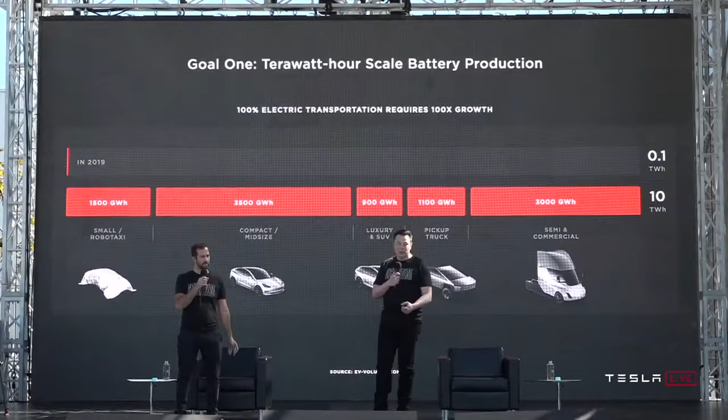Yeah, and you can see we're talking about 100x growth in batteries for electric vehicles to achieve this mission. And we are going to get there. It's just a matter of how fast, and our intention is to accelerate it. Yeah. You basically need on the order of roughly 10 terawatt hours a year of battery production to transition the global fleet of vehicles to electric. And the average vehicle lasts 15 years, so we're talking about 150 terawatt hours, give or take, to transition all vehicles of all types to electric. Yeah, so it's a lot of batteries, basically.

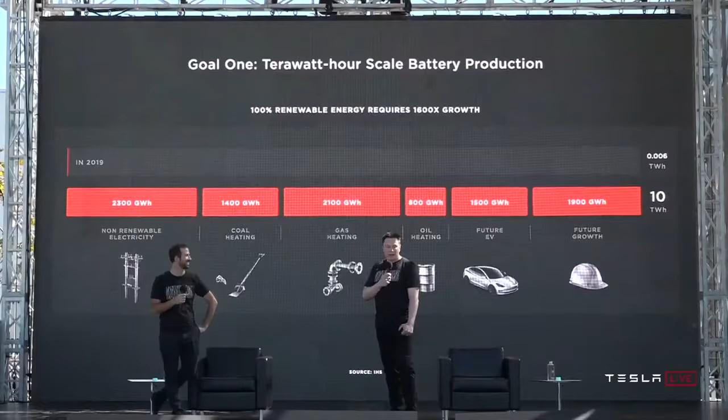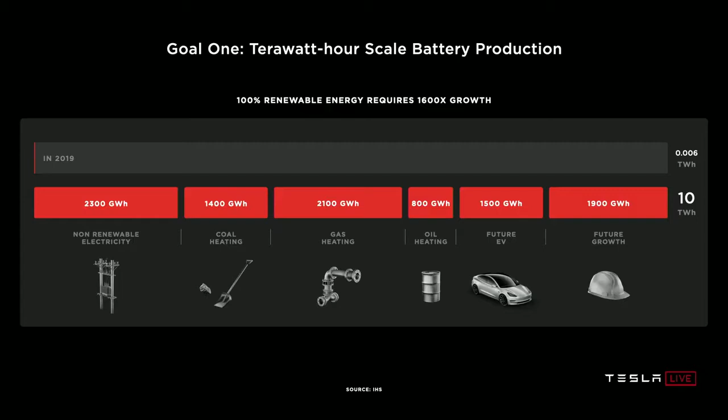And then on the grid side, we have a similar mountain to climb, 1,600 times growth from today's grid batteries to go 100% renewable on the grid and to take all of the existing heating fossil fuel uses in homes and businesses 100% electric. Yeah, and this number might grow even more as the world economy matures and as countries with high populations industrialize. But let's say it's roughly 20 to 25 terawatt hours per year, sustained for 15 to 25 years, to transition the world to renewable. This is a lot.

So today's batteries cannot scale fast enough. They're just too small. For Giga Nevada, 150 gigawatt hours per year is what we probably expect to make out of there. But this is really pretty small in the grand scheme of things. That's only 0.15 terawatt hours.

And it costs too much. So we would need 135 fully built out Nevada gigafactories to achieve 20 terawatt hours a year. It's not scalable enough of a solution. We need a dramatic rethink of the cell manufacturing system to scale as fast as we can and should.

Yeah, and I think we should view this as more than just a question of money. Money is sort of like an ethereal thing, but it's really the amount of effort. You have a certain amount of effort, in terms of people and machines, and depending on how efficient that effort is, for a given amount of effort, you want the most amount of batteries.

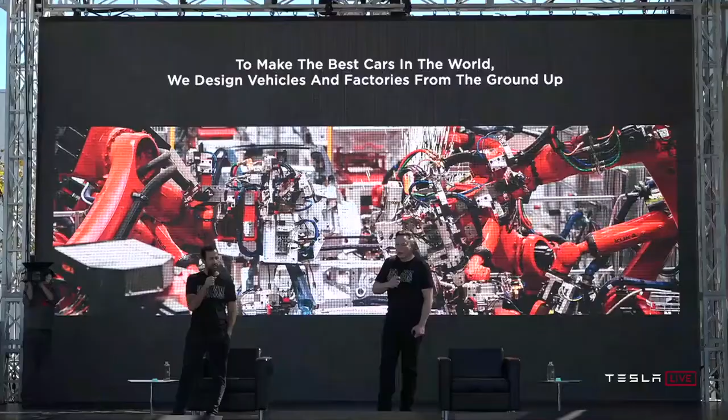And EV market share is growing, but EVs still aren't accessible to all. And you can see, as Drew was saying, it's starting to flatten out a little bit because the rate of improvement of the affordability of cars is just not fast enough. So that's why we got Battery Day. Yeah. To make the best cars in the world, we design vehicles and factories from the ground up. Next. And now we do this for batteries as well.

It's weird, the slides don't show up quite right. Anyway, what shows up on the screen is not quite what shows up there. Oh, okay. It's different. Yeah, I think it's because that's, yeah. No, that one's supposed to be current.

Anyway. So let's get started. We have a plan to halve the cost per kilowatt hour. And it's not a plan that rests on a single innovation, some research project that'll never see the light of day. It's a plan that has taken creative engineering and industrialization across every facet of what makes a cell into a battery pack, from raw material to the finished thing.

And we're going to go through that plan with you today, step by step, and build up how we get to these goals and how we accelerate this transition and make our vehicles and our grid batteries more affordable. Yeah. I mean, we basically thought through every element of the battery, well, almost every element. There are a few more elements that we won't get to today, but we will get to in the future.

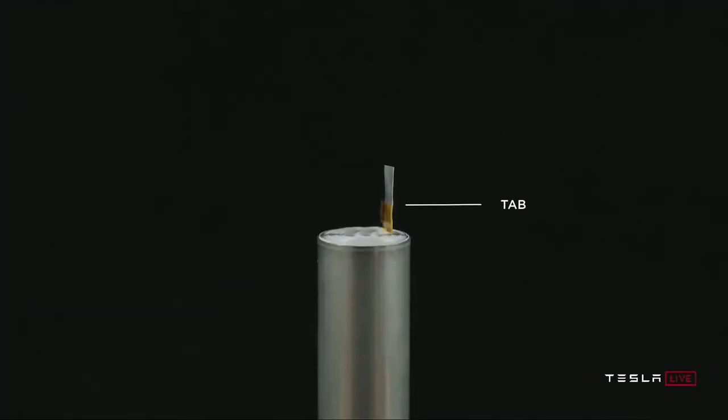So first, before we get too far into it, let's talk about what is in a battery cell. We've got the cap and the can, negative and positive terminals of the cell. When you open that cell, you've got a tab connected to those terminals, what we call the jelly roll, which is the wound electrodes on the inside. You can actually see what this looks like as you unwind it. This is over a meter long in a typical 2170 cell. So it's quite a long winding process. And you can see the tab still there.

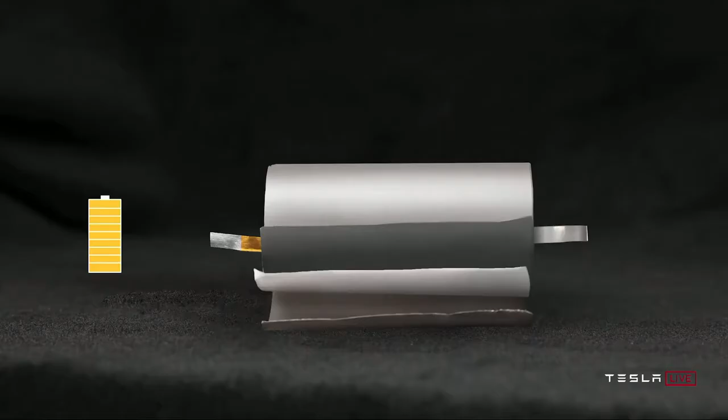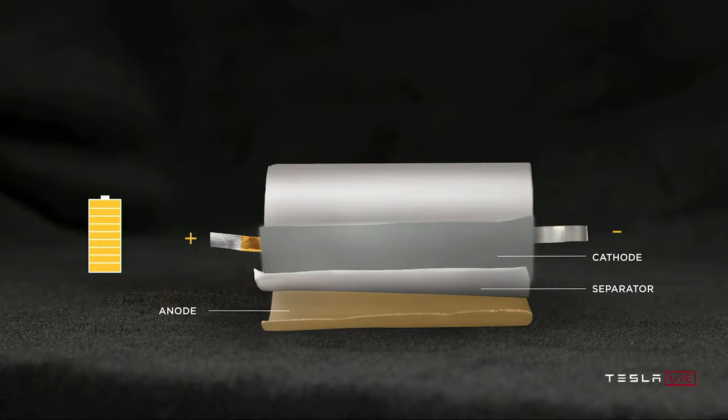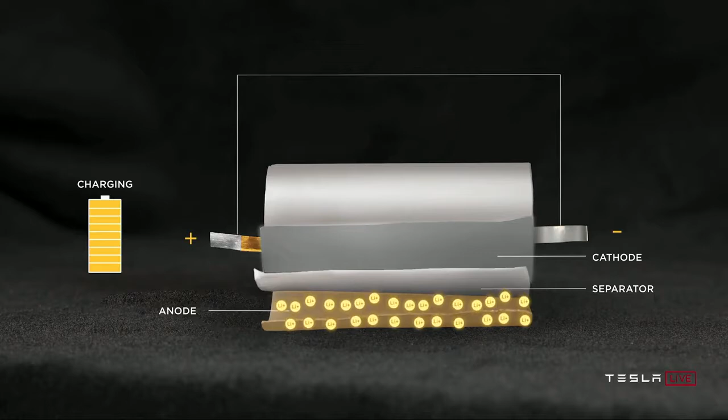To explain what's actually going on here, we've identified anode, cathode, separator, positive and negative terminal. Watch what happens as we discharge the cell. Got lithium moving from anode to cathode, and then the reverse when we charge the cell, lithium moving from cathode to anode across the separator. This is the basis of all lithium-ion batteries, no matter what the form factor is.

And when we look at what's happened to date, at least in our products, we've moved from the 18650 form factor to the 2170 form factor through great collaboration with our partners, Panasonic, new partners like LG and CATL, and probably others in the future.

Yeah. Actually, a slight note on why one is called the 18650 versus the 2170: the first two digits refer to the diameter, and the second two digits refer to the length. So that helps explain what's up with these weird numbers. But nobody could explain to me why there was an extra zero.

So like, okay, well, we're deleting the zero that nobody can explain in future form factors. So that's why technically it's the 18650, bizarrely, but going forward it's the 2170, because we just got rid of the extra zero because it's pointless. And this was an evolutionary step, going from 1865 to 2170, bringing 50% more energy into the cell.

But when we look to the ideal cell design, if we were to do it ourselves, we need to go beyond just what we're looking at in front of us, and study the full spectrum of options. So as you can see, we swept the key figures of merit, how much we can reduce the cost, and how much vehicle range increases as we change the outer diameter of the cell. We found a sweet spot somewhere around 46 millimeters.

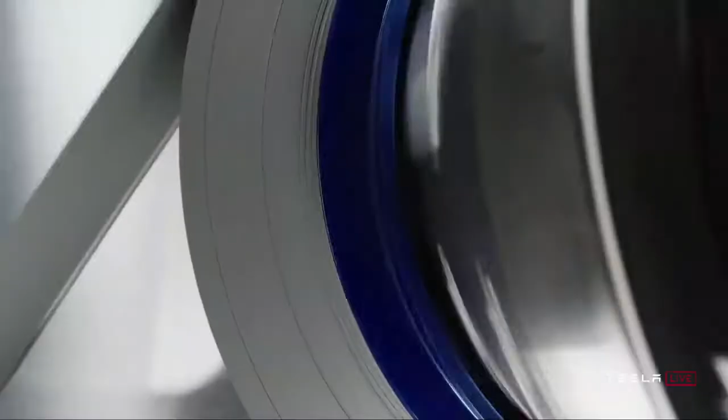Yeah, and I want to stress, this is not just a concept or a rendering. We are starting to ramp up manufacturing of these cells at our pilot 10 gigawatt hour production facility just around the corner. Yeah. So, yeah. It's a video of some of what's going on in the plant.

Now, to be clear, it will take about a year to reach the 10 gigawatt hour capacity. So this is important to appreciate. When you build a factory, there's a certain capacity that you design to, and then it takes some period of time to actually achieve that capacity. So I would say it's probably about a year before we get to the 10 gigawatt hour annualized rate with the pilot plant. And this is just a pilot plant.

The actual production plants will be more on the order of maybe 200 gigawatt hours, maybe more over time. And thank you.

But let's stack up everything we just saw at the cell level. So just the cell form factor change enables a 14% dollar per kilowatt hour reduction, just that cell form factor change. And now that you've been teased on this factory, we're going to go on and walk step by step through that factory and discuss a series of innovations there.

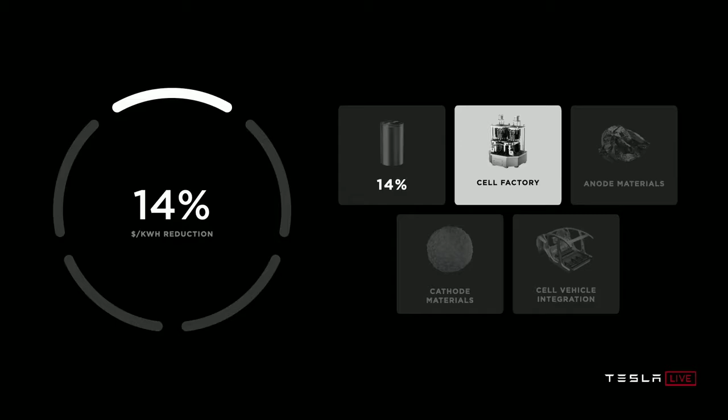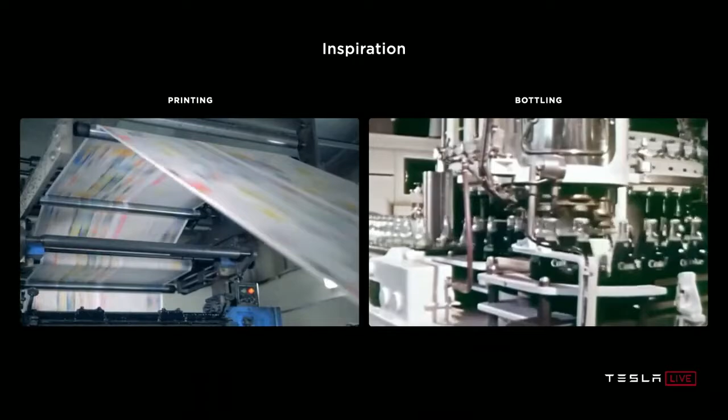When thinking about the ideal cell factory, we have inspirations behind us in the paper and bottling industry, where from humble beginnings, over a century of innovation has enabled mass scale, continuous motion, unbelievably low manufacturing cost. And when we think about the lithium-ion industry, which is really only in its third decade of high-volume production, it has so far to go to achieve similar scale and simplicity. And that was the inspiration that we set out to the team as we thought about how to marry cell design and manufacturing in the best possible factory.

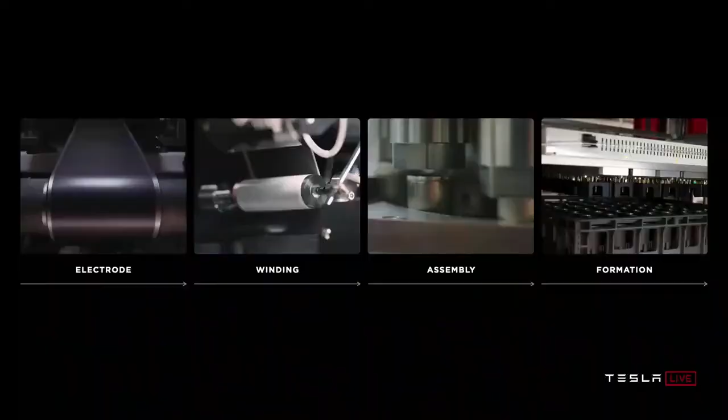And let's talk a little bit about what's in a cell factory. First, there's an electrode process where the active materials are coated into films onto foils. Then those coated foils are wound in the winding process we just talked about, where if you do have tabs, you have to start and stop a lot.

Then the jelly roll is assembled into the can, sealed, filled with electrolyte, and then sent to formation, where the cell is charged for the first time, and where the electrochemistry is set and the quality of the cell is verified. And we set out at every step of this process to try to take that inspiration we just showed and think about how we make those processes fundamentally better and more scalable.

And one of the most important processes is where it all begins, the wet process of the electrode coating. And just to give you all a sense of scale, I'm going to walk through what's in that wet process. You've got mixing where the powders are mixed with either a water or a solvent for the cathode. That mix then goes into a large coat and dry oven where the slurry is coated onto the foil, huge ovens, tens of meters long, dried, and that solvent then has to be recovered. You can see the solvent recovery system.

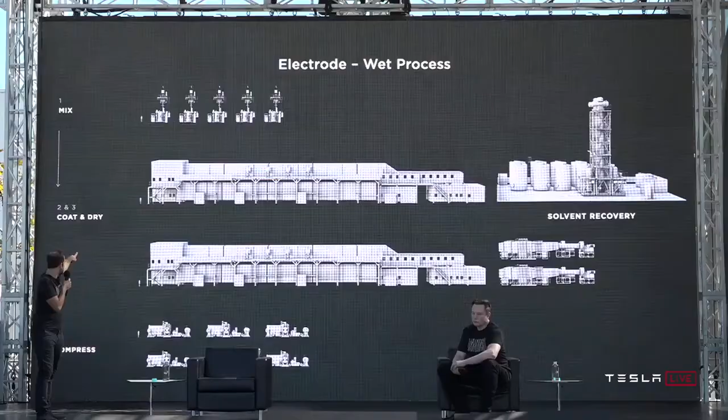And then finally, the coated foil is compressed to the final density. And when you're looking at this, you're like, wow, that's a lot of equipment for one step, especially when you consider that little speck next to the coating oven is a person. This is serious iron involved in making batteries.

Wouldn't it be great if we could skip that solvent step, which is one of those dig a ditch and then fill it kind of things where you put the solvent in and then take it out and recycle it, and just go straight to dry mix to coat? And that's what the dry process really is about. And in the most basic form, you can see it here on a benchtop. Literally, powder into film. As simple as that.

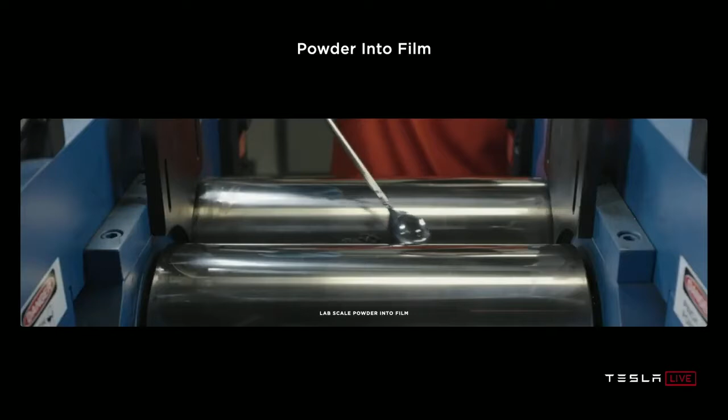I mean, it's hard, actually, just to be clear. If this was easy, everyone would do it. So it's not like dry coating electrode is actually easy. It's actually very hard to do what appears to be a simple thing.

And it's worth noting, we did acquire Maxwell a little over a year ago, I guess. It's certainly a good company, but the dry coating they had was, I would call, proof of concept. Since the acquisition, we've actually revved the machine that does dry coating 4 times. So we're in revision 4 post acquisition of the machine, and there's still a lot of work to do.

So I would not say this is like completely in the bag. It's still a lot of work to do, and as you go from benchtop to lab to pilot to volume production, there are actually major issues that you encounter at every level. It's not like you make something work on your bench and bingo, now you can make a bazillion of it. Absolutely. It's insanely difficult to scale up.

Yeah, to be clear, I would like to not say that right now it's just totally working. Even now, at the pilot plant level, it is close to working. Well, it's fair to say it does work, but with not a high yield. Yeah. So we're still ironing out the kinks, but we've made tens of thousands of cells, thousands of kilometers of electrode. We are on the 4th generation of the equipment, so we've learned a lot along the way.

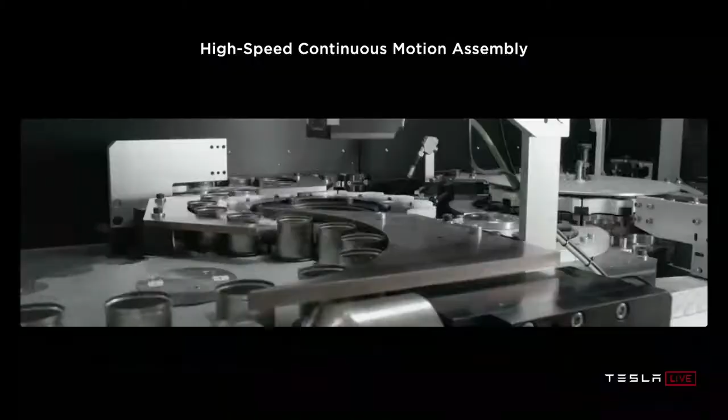The key to a high-performing assembly line is accomplishing processes while in motion, continuous motion, and thinking of the line as a highway, max velocity down the highway, no start and stop, no city driving. Exactly, no stoplights and traffic lights or anything. You want the highway. I want the highway.

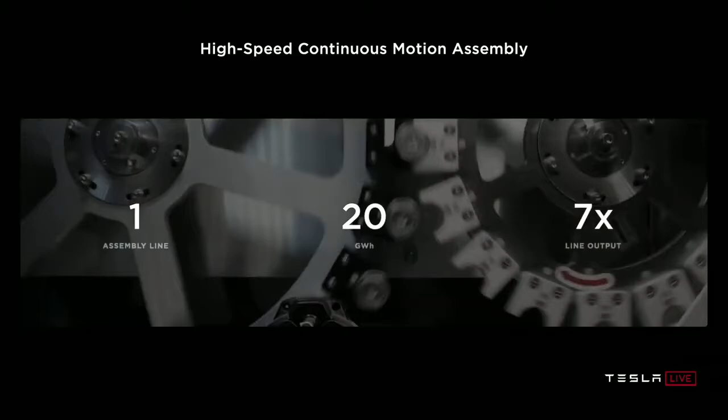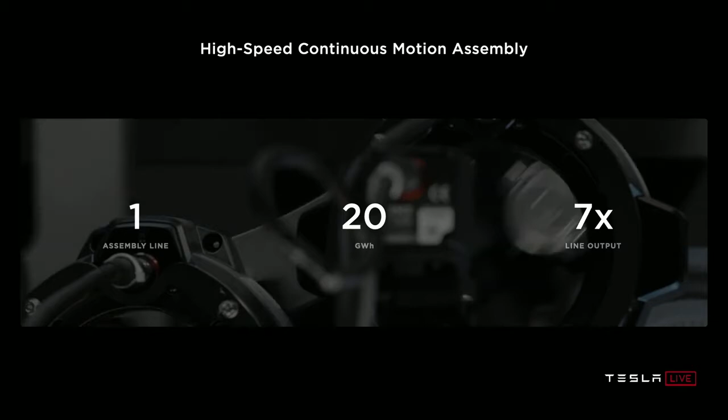Yeah. And together with our internal design team that makes and designs this equipment, we coupled thinking about how to make the best cell with thinking about how to make the best equipment so that we could accomplish the fastest parts per minute rates on all of these tools. And through all of that development, we were able to get to the point where we can implement assembly lines: one line, 20 gigawatt hours, 7 times increase in output per line. And when you're thinking about scalability and pure effort, having one line be 7x the capability is just effort multiplying. Yeah.

You can sort of think about the fundamental physics of a factory. I think it's actually quite a lot like the rocket equation, where you've got your exhaust velocity and then the log of the start to end masses. So it's basically saying, how fast are things going and what percentage of the factory volume is doing useful work. And conveyance does not count as useful work. So only the value-added steps.

If you break the factory down into cubic meter sections, or smaller, it could be like 1 liter sections, and say, is a majority of this volume doing useful work? You would be astounded at how bad most factories are. They're like maybe 2 or 3%, including our factory in Fremont. So I think it is possible to get to at least 10 times that volumetric efficiency. So more like 30% ish, maybe more, and be 10x better, which means the factory can be 10 times smaller.

And then the other thing is how fast are things going through the factory? It's like speed and density. A factory that's moving at say twice the speed of another factory is equivalent to two factories basically, and the company that will be successful is the company that with one factory can accomplish what other companies take 2 or 3 or 4 factories to do. So what we're trying to do here is say, okay, how do we with one factory achieve what maybe 5 or even 10 factories would normally be required to achieve?

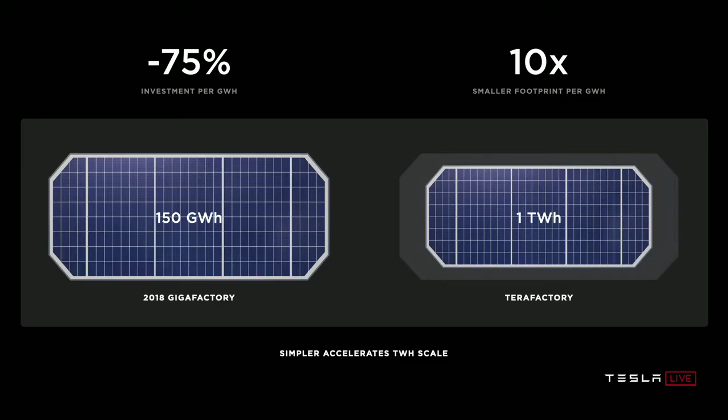Sure. So, essentially, what this translates to, based on what we know today, is about a 75% reduction in the investment per kilowatt hour or gigawatt hour. It's just basically 4 times better than the current state of the art, to the best of our knowledge. And I think there's probably room to improve even beyond that. Definitely, yeah.

We're able to, from a volume standpoint, in a smaller form factor than Giga Nevada, get many times the cell output. So you can see, basically, we can get a terawatt hour in less space than it took to make 150 gigawatt hours. So this is pretty profound. I would actually not have thought this was possible several years ago.

That we could actually get to terawatt hour scale in less space than what we currently envision for doing 150 gigawatt hours. Yes, simpler accelerates terawatt hour scale, and that's what we need to do to accelerate our mission. And as Elon said, we're going to try to even improve on this as we push towards our goals. Yeah. So this is just talking about Tesla internal cell production.

As I tweeted out earlier, we will continue to use our cell suppliers, Panasonic and LG and CATL. So this is 100 gigawatt hours supplemental to what we buy from suppliers. Essentially, this does reduce our weighted average cost of a cell because it allows us to make a lot more cars and a lot more stationary storage.

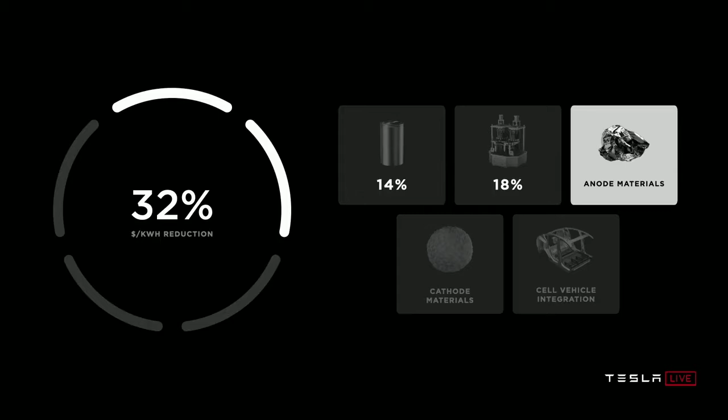And not only is all of that manufacturing innovation fantastic for enabling scale, it's also an additional 18% reduction in dollar per kilowatt hour at the battery pack level. But wait, there's more. Yeah. So we have a manufacturing system. We've got a cell design. What are the active materials we're going to put in that cell design?

Let's talk about the anode first. Let's talk about silicon. Why is silicon awesome? It's awesome because it's the most abundant element in the Earth's crust after oxygen, which means it's everywhere. It's sand. Sand is silicon dioxide. And it happens to store 9 times more lithium than graphite, which is the typical anode material in lithium-ion batteries today. So why isn't everybody using it?

The main reason is because the challenge with silicon is that it expands 4x when fully charged with lithium. And basically, with all of that expansion stress, the particles start cracking, they start electrically isolating, you lose capacity, the energy retention of the battery starts to fade, and it also gums up with a passivation layer that has to keep reforming as the particles expand. Yeah, basically, with silicon, the cookie crumbles and gets gooey. That's basically what happens. Good analogy.

And current approaches to solve this, which exist, I mean, we have silicon in the cars that you're all in right now, involve highly engineered, expensive materials in the scheme of things. Now, they're still great, and they enable some of the benefits of silicon. They just don't enable all of it, and they're not scalable enough. And you can see some of the things that maybe you've heard of, SiO, silicon with carbon, or silicon nanowires. That's kind of the space right now.

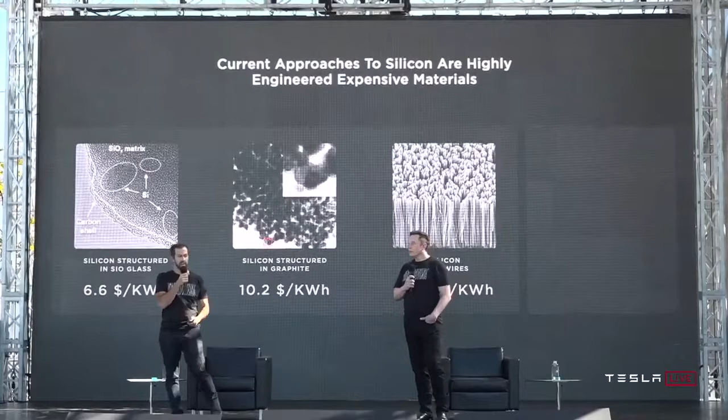What we're proposing is a step change in capability and a step change in cost. And what that really is, is to just go to the raw metallurgical silicon itself. Don't engineer the base metal. Just start with that and design for it to expand in how you think of the particle in the electrode design and how you coat it.

Yeah, I'm not sure if you saw this. Basically, $1 per kilowatt hour. Basically, if you use simple silicon, it's dramatically less than even the silicon that is currently used in the batteries that are made today. And you can use a lot more of it. The anode, with this silicon, costs $1.20 a kilowatt hour.

And how does it work? Start with raw metallurgical silicon, stabilize the surface with an elastic ion-conducting polymer coating that is applied through a very scalable approach. No chemical vapor deposition, no highly engineered high capex solutions, and then integrate it into the electrode through a robust network formed out of a highly elastic binder. And in the end, by leveraging this silicon to its potential, we can increase the range of our vehicles by an additional 20%, just this improvement. Yeah, it gets cheaper and longer range.

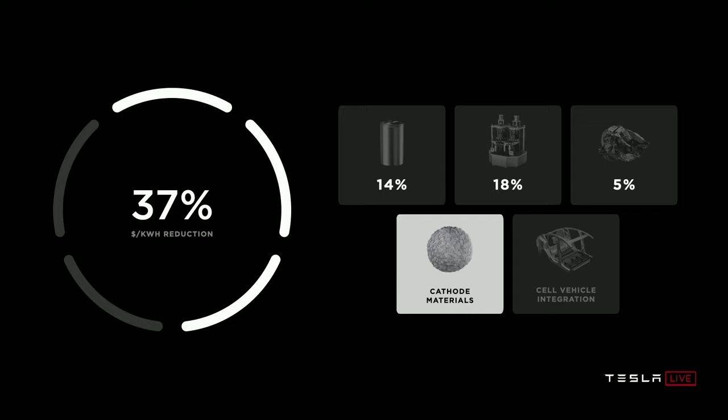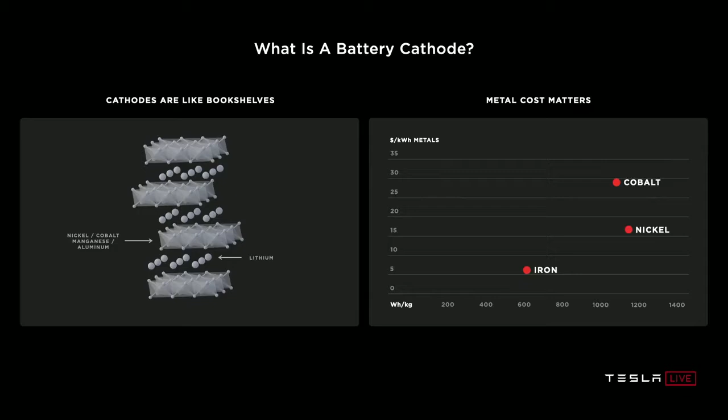And when we take that anode cost reduction, we're looking at another 5% dollar per kilowatt hour reduction at the battery pack level. And there's more. Let's talk about cathodes. What is a battery cathode? Cathodes are like bookshelves where the metal, the nickel, the cobalt, the manganese, or aluminum is like the shelf, and the lithium is the book. And really, what sets apart these different metals is how many books of lithium they can fit on the shelves and how sturdy the shelves are.

Cobalt is a... Yeah, sorry, I was just going to say, it's tough to exactly figure out what the right analogy is to explain cathode and anode, but a bookshelf is probably a pretty good one, in the sense that you need a stable structure to contain the ions. So you want a structure that does not crumble or get gooey, that holds its shape in both the cathode and the anode. As you're moving these ions back and forth, it needs to retain its structure. If it doesn't, then you lose cycle life, and your battery capacity drops very quickly. Absolutely, I totally agree.

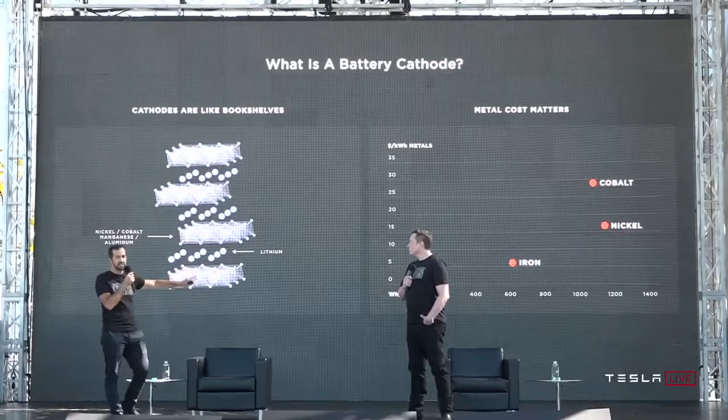And I think people are always talking about, oh, what's the cathode going to be? Is it NCA or whatever? The thing to consider is just fundamentally what the metals are capable of, and that's what we have on the chart here. Dollar per kilowatt hour cathode of just the metal, using London Metal Exchange prices, versus the energy density of just the cathode. And you can see nickel is the cheapest and the highest energy density, and that's why increasing nickel is a goal of ours and really everybody's in the battery industry.

But one of the reasons why cobalt is even used at all is because it is a very stable bookshelf, and the challenge with going to pure nickel is stabilizing that bookshelf with only nickel. And that's what we've been working on with our high nickel cathode development, which has 0 cobalt in it. Leveraging novel coatings and dopants, we can get a 15% reduction in cathode dollar per kilowatt hour. Big deal.

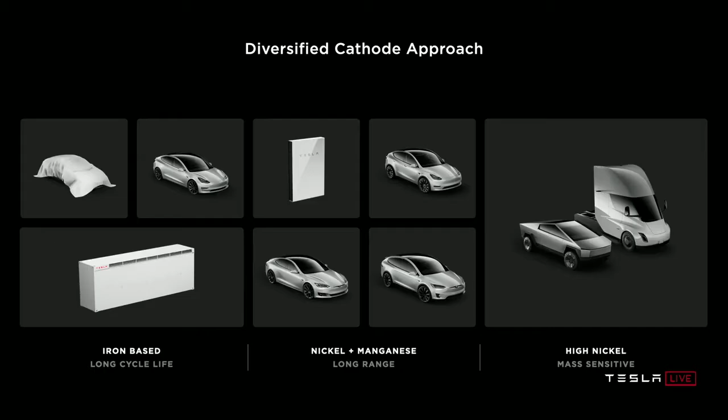But it's not just about nickel. You want to? Yeah, sure. So in order to scale, we really need to make sure that we're not constrained by total nickel availability. I actually spoke with the CEOs of the biggest mining companies in the world and said, please make more nickel. It's very important. And so I think they are going to make more nickel.

But I think we need to have a 3-tiered approach to batteries. Starting with iron, that's kind of like a medium range, and then nickel manganese as sort of a medium plus, intermediate, and then high nickel for long range applications like Cybertruck and the Semi. Something like a semi truck, it's extremely important to have high energy density in order to get long range. And just to give iron a bit more credit, although if you look at the watt-hours per kilogram at the cathode level of iron, it looks like nickel's twice as good.

But when you fully consider it at the pack level, everything else taken into account, nickel is about maybe 50 or 60% better than iron. So iron is a little better than it would seem when you look at it at the pack level fully considered. It's not as good as nickel. Nickel is like 50 to 60% better, but it's actually pretty good. And so, good for stationary storage and for medium range applications where energy density is not paramount.

And then, like I said, for intermediate, it's kind of a nickel manganese, and it's relatively straightforward to do a cathode that's 2/3 nickel, 1/3 manganese, which would then allow us to make 50% more cell volume with the same amount of nickel, and with very little energy trade-off. Just enough to have you still want to use 100% nickel for something like a semi-truck, but really not much of a sacrifice at all.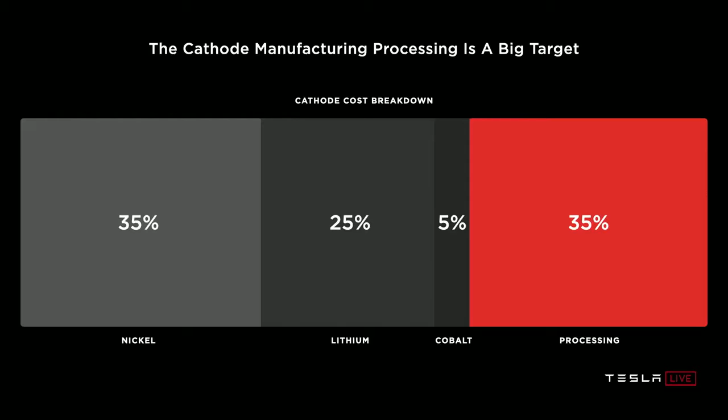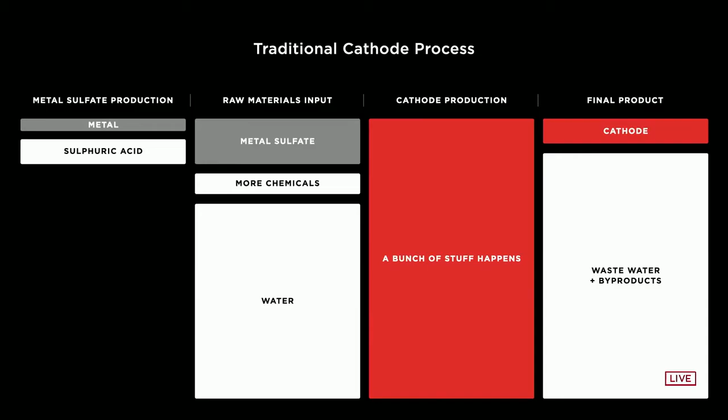Yeah, it's insanely complicated. If you look at the total, it's a small world journey of: I am a nickel atom, what happens to me? And it's crazy. You're going around the world 3 times. There's like the moral equivalent of digging the ditch, filling the ditch, and digging the ditch again. It's total madness, basically. These things just grew up as legacy things, how it was done before, and then they connected the dots, but really didn't think of the whole thing from a first principles standpoint, saying how do we get from the nickel ore in the ground to the finished nickel product for a battery.

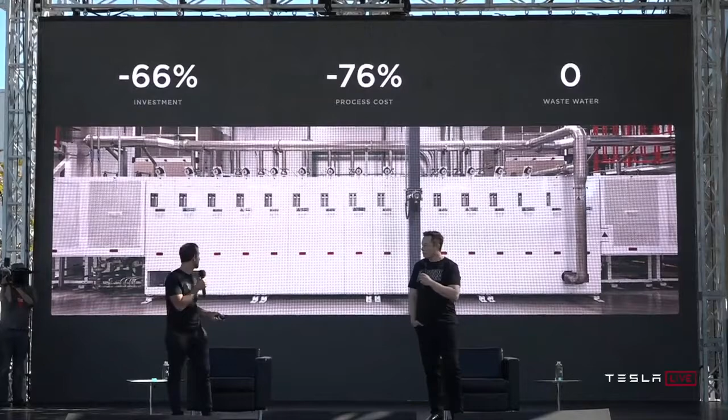And so we've looked at the entire value chain and said, how can we make this as simple as possible? And that's what we're proposing here with our process. As you can see, a whole lot less is going on here. We get rid of the intermediate: metal, water, final product cathode, recirculate the water, no wastewater at all. And when you summarize all of that, it's a 66% reduction in CapEx investment, a 76% reduction in process cost, and zero wastewater. Much more scalable solution.

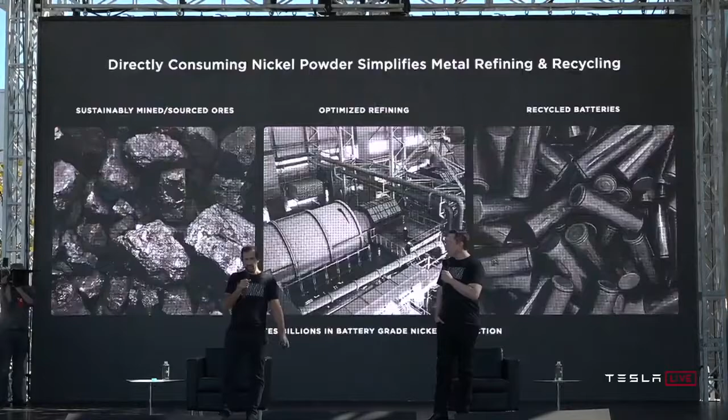And when you think about the fact that now we're directly consuming the raw metal nickel powder, it dramatically simplifies the metal refining part of the whole process. So we can eliminate billions in battery-grade nickel intermediate production. It's not needed at all. And we can also use that same process to directly consume the metal powder coming out of recycled electric vehicle and grid storage batteries. So this process enables both simpler mining and simpler recycling.

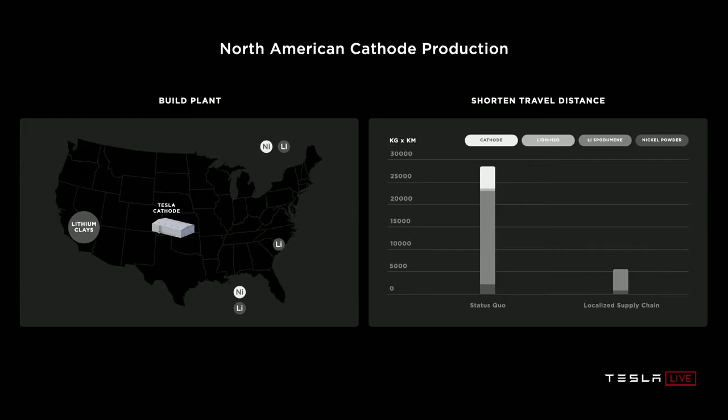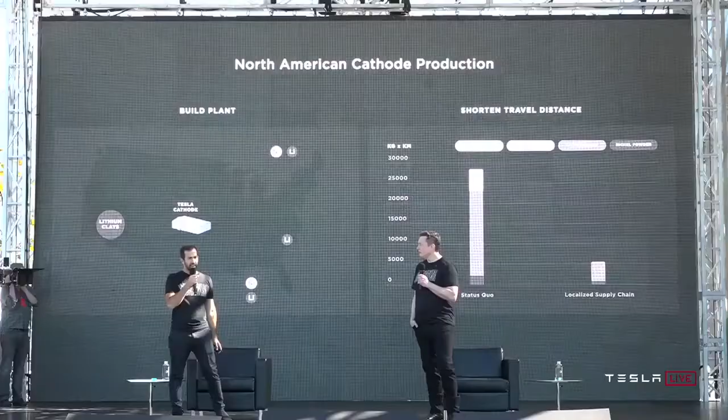And now that we have this process, we're going to start building our own cathode facility in North America, leveraging all of the North American resources for nickel and lithium. Just localizing our cathode supply chain and production, we can reduce miles traveled by all the materials that end up in the cathode by 80%, which is huge for cost. To be clear, cathode production would be part of the Tesla cell production plant. So raw materials come from the mine, and out comes a battery.

And on that note, the way the lithium ends up in the cell is through the cathode. So then we should obviously do on-site lithium conversion as well, which we will do using a new process that we're going to pioneer. That's a sulfate-free process, again skipping the intermediate. 33% reduction in lithium cost, 100% electric facility co-located with the cathode plant.

So it's important to note that there is a massive amount of lithium on Earth. Yeah. So lithium is not like oil. There's a massive amount of it pretty much everywhere. In fact, there's enough lithium in the United States to convert the entire United States fleet to electric. Like all the cars in the United States, there's like 300 million or something like that.

Every vehicle in the United States can be converted to electric using only lithium that is available in the United States. Discovered today. What we already know exists. People really haven't even been looking. Yeah, people haven't been trying because it's just widely available. So, but it is important to say, okay, what is the smartest way to take the ore and extract the lithium and do so in an environmentally friendly way?

And we actually discovered, again, looking at it from a first principles physics standpoint, instead of just the way it's always been done, that we can actually use table salt, sodium chloride, to basically extract the lithium from the ore. Nobody's done this before. To the best of my knowledge, nobody's done this. And all the elements are reusable. It's a very sustainable way of obtaining lithium.

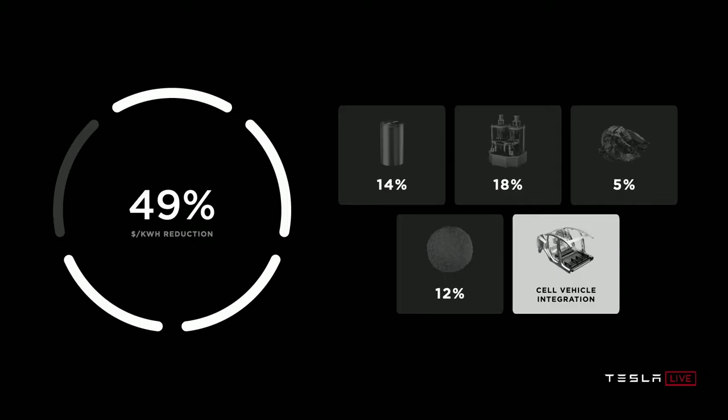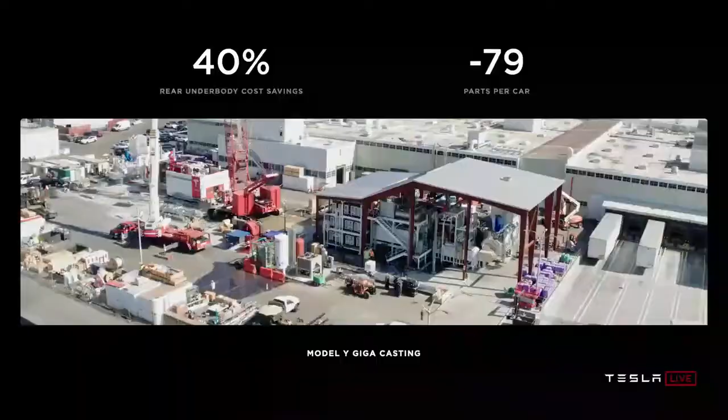So there's an architecture that we've been wanting to do at Tesla for a long time, and we finally figured it out. And I think it's the way that all electric cars in the future will ultimately be made. It's the right way to do things. So it starts with having a single piece casting for the front body and the rear body. And in order to do this, we commissioned the largest casting machine that has ever been made, and it's currently working just over the road at our Fremont plant. It's pretty sweet.

Currently making the entire rear section of the car as a single piece, high pressure die cast aluminum. And in order to do this, we actually had to develop our own alloy because we wanted a high strength casting alloy that did not require coatings or heat treatment. This is a big deal for castings, especially with a large casting. If you heat treat it afterwards, it tends to deform. It kind of does this potato chip thing.

So it's very hard to keep a large casting to have its shape. So in order to achieve this, there was no alloy that existed that could do this. So we developed our own alloy, a special alloy of aluminum that has high strength without heat treat and is very castable. So that's a great achievement of our materials team. In fact, in general, we've got a lot of advanced materials coming for Tesla, new alloys and materials that have never existed before.

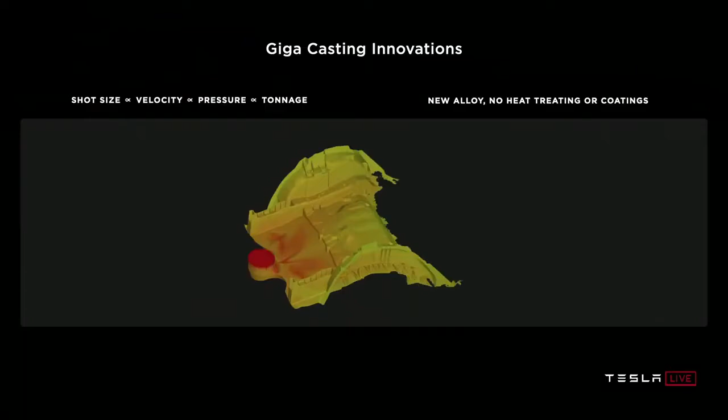So you're basically making the front and rear of the car as a single piece, and then that interfaces to what we call the structural battery, where the battery for the first time will have dual use. The battery will both have the use as an energy device and as structure. This is absolutely the way things are done.

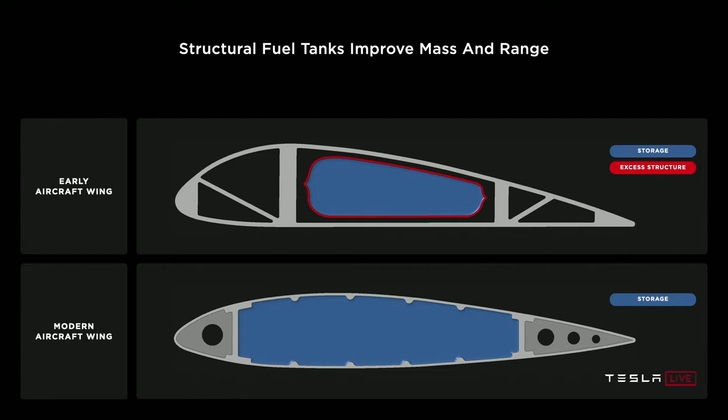In the early days of aircraft, they would carry the fuel tanks as cargo. So the fuel tanks actually were quite difficult to carry. They were basically worse than cargo. You had to kind of bolt them down. It was very difficult. And then somebody said, "Hey, what if we just make the wing tanks? What if we just make the fuel tank in wing shape?" So all modern airplanes, your wing is just a fuel tank in wing shape.

This is absolutely the way to do it. And then the fuel tank serves as dual structure, and it's no longer cargo. It's fundamental to the structure of the aircraft. This was a major breakthrough. We're doing the same for cars. So this is really quite profound.

Effectively, the non-cell portion of the battery has negative mass. We save more mass in the rest of the vehicle than the non-cell portion of the battery. So it's like, well, how do you really minimize the mass of a battery? Make it negative. Make the non-cell portion of the battery pack negative.

It also allows us to pack the cells more densely because we do not have intermediate structure in the battery pack. So instead of having these supports and stabilizers and stringers and structural elements in the battery, we now have a lot more space in the battery because the pack itself is structural. And what we do is essentially, instead of having just a filler that is a flame retardant, which is currently what is in the 3 and Y battery packs, we have a filler that is a structural adhesive, as well as flame retardant.

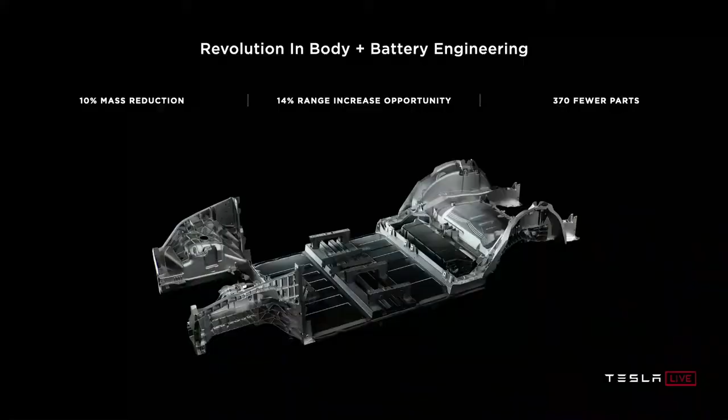It also improves what's called the polar moment of inertia, which you can think of like an ice skater, arms out or arms in. Arms in, you rotate faster. So if you can bring things closer to the center, you reduce the polar moment of inertia, and that means the car maneuvers better. It just feels better. You don't know why, but it just feels more agile. So it's really cool. This is really major. Like I said, 10% mass reduction in the body of the car, 14% range increase, 370 fewer parts.

So, I really think that long term, any cars that do not take this architecture will not be competitive. And it's not just at the product level a better product, but in the factory it's a massive simplification. You saw the part removal. It's casting machines. It's the structural battery pack. So we're looking at over 50% reduction in investment per gigawatt hour, 35% reduction in floor space, and we'll continue to improve that as we make the vehicle factory of the future.

Yeah, so it's major improvements on all fronts, from the cell all the way to the vehicle. And in addition to the improvements we just said on enabling additional range and improving the structural performance of the vehicle, it is worth another 7% dollar per kilowatt hour reduction at the battery pack level, bringing our total reductions now to 56% dollars per kilowatt hour. Yeah.

Yeah. All right, so stacking it up, we're not just talking about cost or range. We've got to look at all the facets. So range increase, we're unlocking up to 54% increase in range for our vehicles and energy density for our energy products. 56% reduction in dollars per kilowatt hour at the battery pack level, and a 69% reduction in investment per gigawatt hour, which is the true enabler when we talk back about how do we achieve this scale problem here. Yeah.